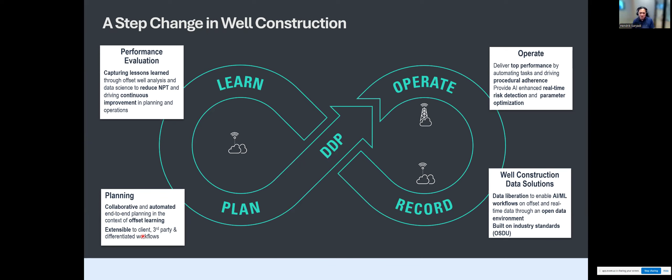In the past, it was a hell of a job for many years when different operators took over, because they needed to manually bring data from the old, let's say, Shell system and convert it to the Total system. Something happens in between, etc. Right, so I'll show you more about it. Does that answer your question? Yes, it does. Thank you. I hope you will understand more of the challenge and what we've achieved in the next couple of slides.

So the first thing when we bring in digital transformation, which is happening in many other industries as well, is cloud computing. Why is this a game changer? First, it changed the way we collaborate. I hope everybody here is familiar with Microsoft 365, right? You can work together in one document. Ten people can work on it together, no matter if they're in the same room, same city, or working at the same time. You can update that one document and you have a history record of who updated what, and that's how we want to collaborate.

At the end of the day, what we deliver is the drilling program. It's still a document. We still work with the document, but now the document is digital. Or you can still print it as a copy, but at least now it's not like you're sending an email: could you please update this? And then you send it on: I already updated, could you send it to the next person? Everybody can jump in together.

You've been requesting, okay, please attach this picture there, and so on. That's changing the collaboration. That is possible because now we put things in the cloud, right? Not on one person's computer.

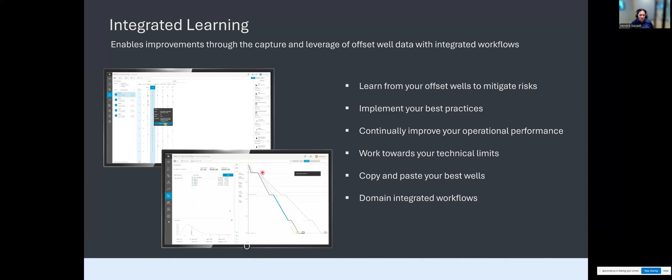Whatever you want to ask: what is the weak formation? What was the last FIT being used? Then you start asking what-if scenarios. What happens if I increase by 0.2 ppg, all those things? And at the end, probably this is what interests you: just create me a time versus depth. So instead of the drilling engineer manually plotting time versus depth for every single offset well drilled before, the application reads it by itself, generates this plot in the background, and at the end just proposes the best estimate.

So I've been talking about this one. So now after you learn, how do you plan the well? This is always what happened traditionally, and many of us are still doing it these days. How many software do you need to use to plan a well? You expect planning the well to be very straightforward like this, and it would be nice. I know where I can put my rig. I know where the target given from the G&G is. Okay, I plan the trajectory. Good.

Based on my trajectory, I can plan my pressure window. I can predict where my formation tops are, what the formation temperatures are. Good. Then based on this, I can plan my casing points, wellbore geometry, what size of casing. Good. Then I can start planning how to drill each section, what BHA, and that's it. Finish the drilling program. That's what we want to be reality to make our life easy.

Apparently, that's not the case, right? You're doing all this, and then when you design the run, they say, oh, of course, my BHA will not be able to deliver the trajectory. Now I need to revise the trajectory. If you revise the trajectory, the pressure window calculation changes, the formation tops change, the formation temperature prediction changes. Then you need to redo the casing design again, right? You try it again. Did you find a tool that can deliver the trajectory?

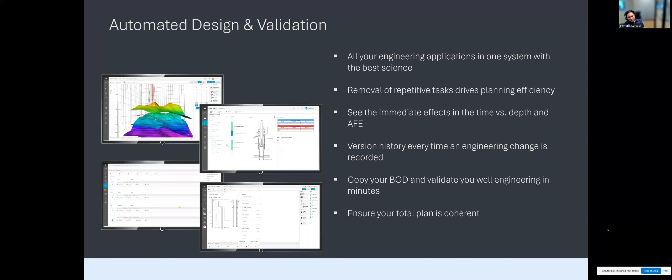So the steps can be like this. It knows what different designs need to be done, right? I hope people here are a little familiar with what's involved in making a drilling program. You have to design the fluid, check the casing integrity, design the trajectory, select the rig with all the equipment and its specifications, calculate kick tolerance, etc., right?

Then the idea is, if someone is making changes on one of these objects, for example, changing a trajectory, in the background it should just trigger all those different engineering calculations. So whenever we engineer or design something, there is always a validation check. You calculate the hydraulics, see what the ECD is, what the total pressure is, how the hole cleaning is.

When you try to run a liner, what is the best speed? Is the speed okay, or is it going to cause swab or surge? Can you pull it in case you get stuck? In case you rotate, can the torque still be handled by the makeup torque of the casing joint, or the BHA, or the pipe, or even the top drive, etc., etc.

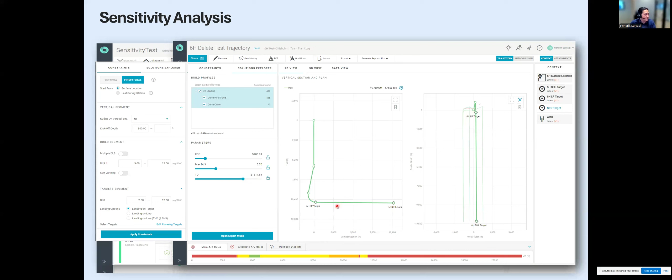Same thing when you run an engineering calculation. Doesn't matter whatever calculation you run: casing design, kick tolerance, torque and drag, hydraulics. Those results are a combination of parameters, right? And normally you run it once, you see the value, you don't like it, you change something in the parameters, you run it again, and then you keep doing that.

Now we ask the computer to do it differently. Say, I want you to please run the hydraulic calculation and torque and drag for all this section, right? Calculate every 100 feet I'm drilling, and I want the combination of, we call it sample rate 4. So calculate with 4 weight on bit, 4 RPM, 4 flow rate, and 4 fluid density, right? Or in this case 5, 5, 5, 5.

You submit. Of course, it goes to the cloud, using all the computing power of the cloud server, giving you back the result. Now you have thousands, even millions of dots that you need to display. Then of course, when you display it, you need to have an interactive display. Excel will not be able to plot this output. You need something more powerful, like Power BI or Spotfire or whatever it is.

Then now you can see, you can choose. I want to see all the results with 122 RPM, right? And then the graphics are seen. So instead of you manually going one by one and changing, now you ask it to calculate first, and then you evaluate. Based on this, it can tell, right? If this is the rig pressure limit, it will tell you that everything you see in green with 1000 GPM, you cannot use it.

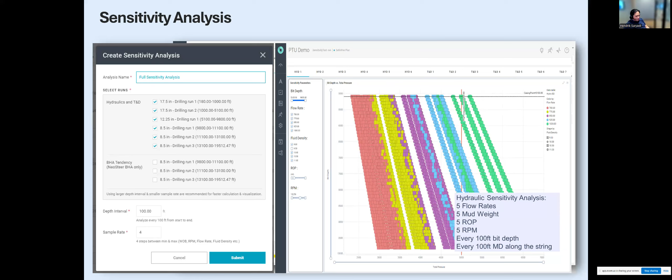So now we're talking about modeling, right? I can do a lot of calculation. I can ask the computer to run me millions of calculations if I want. But the fundamental question still remains the same: how accurate is all this calculation, right? When we try to simulate hydraulics, how accurate is a drilling hydraulic calculation today, right? So,

of course, many of our calculations are based on physics, right? Torque and drag is static and dynamic. Engineers have been doing this in many other industries, right? Hydraulics, you have fluid dynamics, you have temperature effects and everything. Of course, the PhDs run all these different mathematical models, and later on those mathematical models are input to the software modeling, right?

But of course, the challenge of all these pure, we call them first principle models, right? Either thermodynamic, fluid dynamic, statistical strength, whatever you call it, the mechanical engineering stuff, right? The challenge remains the same: they might not capture all the phenomena. This is what I call uncertainty or assumption, right? There's a lot of input involved in what actually happens in drilling.

I know the size of bit that I use. Is the hole being drilled exactly the same as the size of bit I'm putting inside the hole? Well, we can only know if we run a caliper to confirm that. I know the size of the collar. It's made from steel. These are the properties of the steel, how much is the strength, etc. What is the stiffness? We can simulate that. If I rotate at 300 RPM, is it going to induce vibration or not? Well, a lot of PhDs have been studying that. But at the end of the day, it may still not capture the phenomenon.

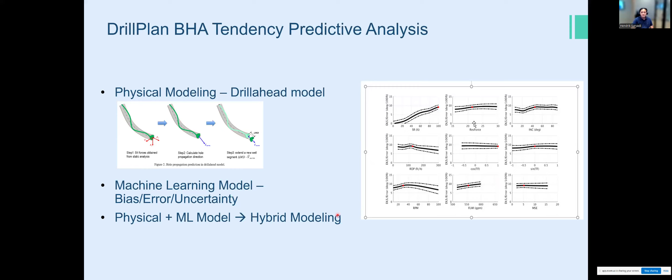The other thing is the digital twin, because we can simulate. Let's say this one is pressure. I want to know the pressure when I'm pumping fluid from the pump down to the bit and back again. What is the pressure distribution? In the past, you needed to put a sensor to know the pressure. Now, because we can simulate all this process and it's getting more and more accurate, I don't need a sensor. This is what we call the digital twin.

You know the value of things without putting in a physical measurement. You make a digital representation of these properties, and then you can simulate many things, and based on that you can make a design. This is being done in other industries, like aircraft, when they're doing a design, right?

Sometimes they don't make all the parts right away and then test them. If they have control of this and a model, they can create the physical asset in the computer and see if everything will work before actually making the part, right? So that's what we call a digital twin. You can simulate things digitally before you need trial and error, because that's going to be expensive.

And this is the fundamental if you want to predict ahead, right? Simulate things digitally, and then use that to see: what if I implement pretty much the same principle in the next well, what is the expected value if the whole system works, right? The same thing as people designing a turbine or an aircraft engine, right?

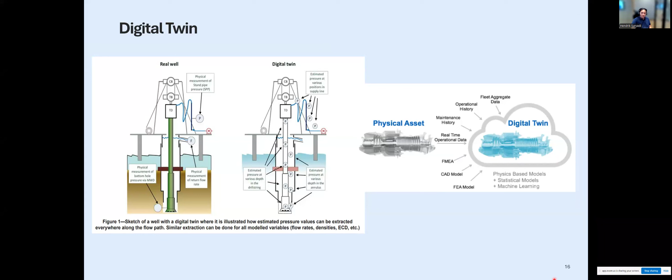There are many other things we learn from other industries. In drilling, we're always dealing with scheduling, right? For example, this is rig scheduling. If I have a fleet of 10 rigs, where should each one go? That's a big task for a person, right? Or even two people, or even a team. They're trying to save cost, but it's only as good as the assumptions.

Apparently in other industries, like a manufacturing line, right? Or even truck scheduling, they just put it in the computer: these are the 10 trucks I have, this is all the work that needs to be done, please suggest the arrangement of tasks, which truck needs to go where.

So the same thing is what we're trying to implement in scheduling our equipment, our rigs, our supply boats, etc. And this AI scheduler was actually developed by Google, I think, if I'm not mistaken. But of course, Microsoft has their own AI scheduler module that you can easily use.

Same thing. Then you start throwing more questions to the digital system. If I have a database, I know the record of performance and attach those records of performance to its BHA performance record or BHA run report. Now I ask a question back: if I'm gonna drill in this field, in this section, please give me a rank. Which one is the best?

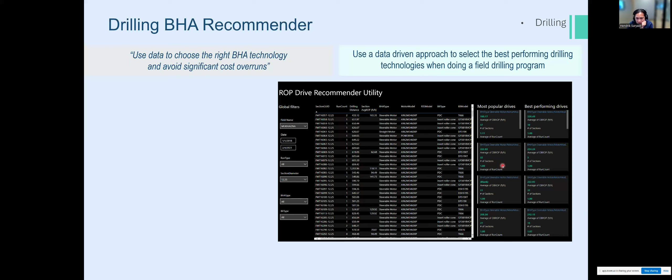Same also while you're drilling. I already showed you a bit of an idea of asking the system to run different scenarios: suggest me the best parameters. In that case, it's just doing the same concept. We've been recording. Every time we drill, we record everything, right? We're recording how much weight on bit applied, flow rate, pump, RPM used, and performance.

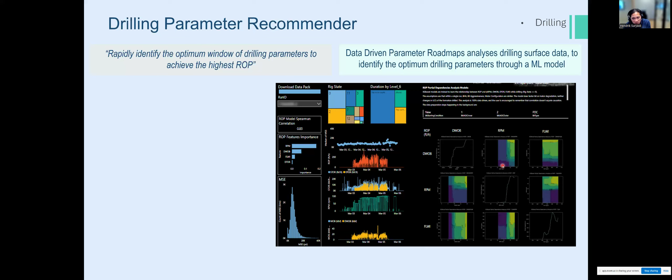Now you're asking the same question to the system: tell me, I'm drilling now in this formation, what is the best ROP, RPM, flow rate I need to use? Then, for example, the bit, you have one bit design. You're asking how many bits I need to order. Is it gonna survive? Then it looks again at the past record. It simulates the probability of survival.

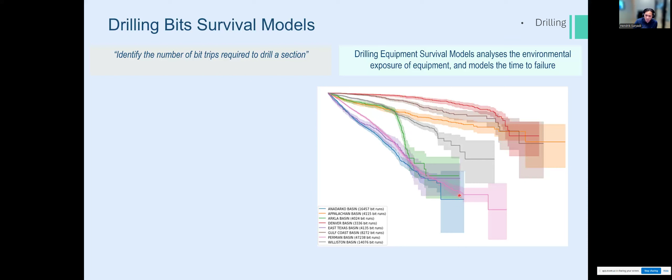This concept is being used in many other industries as well. It's used, for example, in planes, right? To know when they need to stop the plane and do maintenance, right? They will simulate at what point it starts failing, right? So if we can plan ahead to simulate this before we actually put the actual equipment in the hole, then it gives us a better idea to make a decision, right? There are many other things.

If you go digging in SPE, people have been trying to utilize, on top of the data, different kinds of artificial intelligence and machine learning techniques on different topics, right? On predicting gas oil ratio, what does this mean? It's saying I don't need to put a sensor or have someone measure it. If I have these properties, just tell me the gas oil ratio right away. So I don't need a human actually doing it. The same thing also, if you can predict formation types ahead, then you don't need to put LWD in the hole, right?

So at the end of the day, as mentioned, for planning, what we deliver is a smart drilling program. In reality, drilling engineers spend a lot of time like they become a secretary, trying to collect different input from different people involved and putting it together as one nice document, right? Now the question is, can everybody just contribute? So how to make a drilling program collaboratively? I mentioned at the beginning how people need to work. Microsoft 365 and the like have been helping.

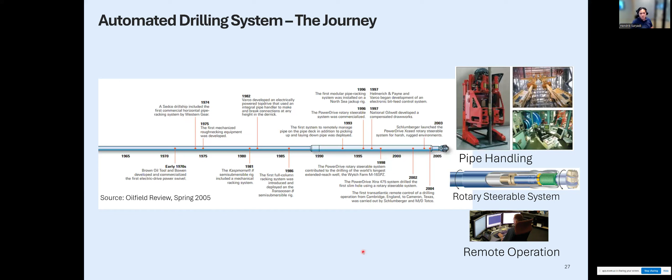And then after the smart system, now we need to start bringing tools that help drillers make decisions, seeing what parameters are used. If I want to increase the ROP, what parameters need to be used. The system, based on engineering calculation or learning from past experience, should be able to tell: okay, in this formation at this depth, based on past experience and my simulation, use this number. Then the driller says agreed,

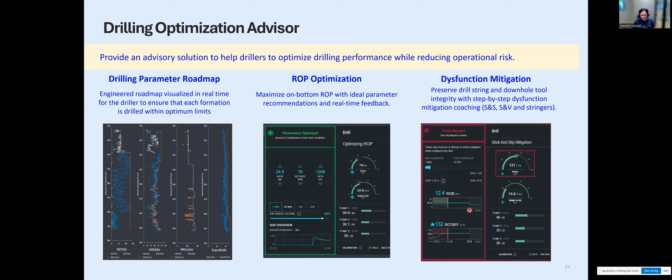and it will adjust the top drive and the pump automatically. Later on, while you're drilling, suddenly there is stick slip or vibration. It gives a warning saying, please follow this step. You agree? Agreed, and it does it. It reduces the weight on bit and increases the RPM within the next 15 seconds. So the goal is this: the driller just needs to watch and wait until something beeps.

Now we've managed to get to where the driller says just go drill a stand. It knows how to go on bottom, increase the pump without causing a pressure surge, tag bottom, and then drill fully and make the connection. With auto ROP, the driller says optimize the ROP. It knows what parameters need to be adjusted, and the computer takes care of the machinery.

If you need to send a command downhole, before the driller or directional driller or MWD needed to adjust the flow manually; now just click a button, send this command to this tool, and it will give the required sequence automatically. So even a steering tool downhole is told: this is the trajectory plan, please deliver this dogleg as per plan, or catch up to the plan if you deviate from it.

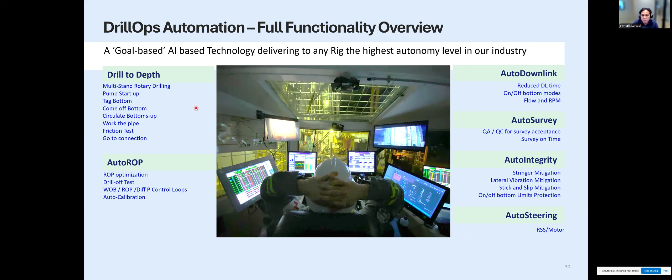So that is in the drilling front. What about all the data from all this machinery that has sensors on the rig? Of course, it also requires maintenance. The idea is to schedule the maintenance not in the critical time of drilling, right? So then you need to predict when is the best time before it actually completely fails, right? So the top drive, the draw works, all this big equipment.

So if the system can read all those data and then predict, okay, if we continue using it like this, in the next 3 days the top drive will need repair. Then it will try to find in the next 3 days when is the time that I can do this maintenance without doing it in the middle of critical drilling time and then causing NPT, right? But sometimes this is a hard decision, unless you have a system that helps analyze the data and proposes that information to you, right?

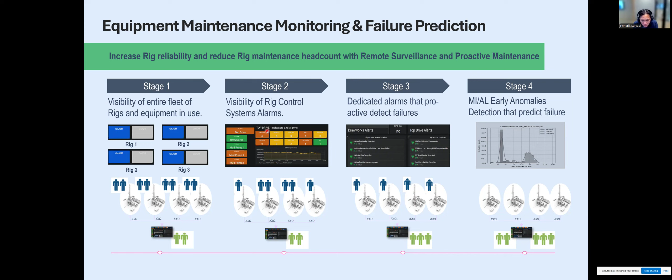So how it's being done is just looking at those digital twins, either by pressure or vibration level or whatever it is, depending on what type of machine you're talking about, temperature and everything, and then they start giving you suggestions, the possibility of failure like this, right? Then people who need to find the schedule time can put it in before it actually completely fails and causes NPT.

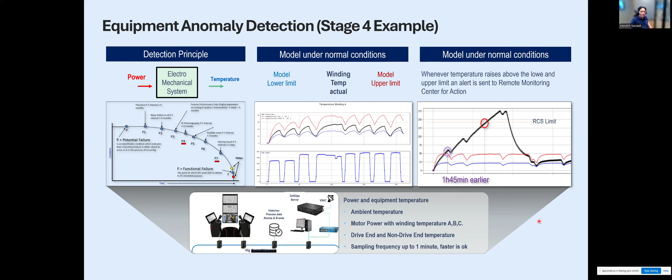The other thing is video surveillance. We can easily put a video camera anywhere now, right? But the question is, do we need to put a human behind it to watch it and then tell someone, you are in the dangerous zone or something will happen? Or I can get the video and then have a computer read the data and only send a notification alert, turn on the alarm when danger occurs, right?

So now that can be done, and you just need to wait until it tells you something will happen, right? So this is being used in truck loading, burner control, well site monitoring, all these different operations. And then all that information can also be sent to town, right? The person doesn't have to be on the rig watching all those things.

But now these days in the monitoring center, sometimes one expert can monitor 4 or 5 wells, because he doesn't need to look at the data coming in at every single depth, right? He just needs to rely on the smart monitoring. Whenever one of these raises an alarm, then he can review the information, make a decision, right? And take action. And then after that, leave the computer helping him monitor the data and wait until the next alarm comes. So that is smart monitoring.

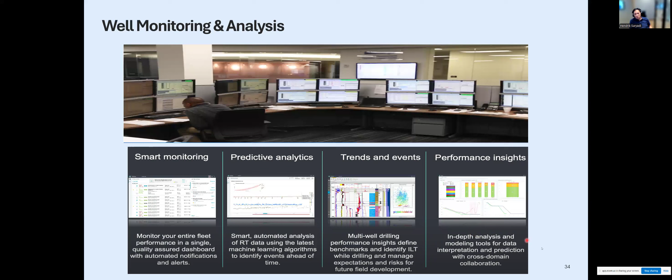And then at the end, after all this is monitored, what we are always interested in is: give us a summary of the performance and which areas we can improve. All right. If at the end it can just summarize that, make a quick plot, then I know what things to think further about for the next planning, or during drilling, what things need to be improved day by day. All right. So yeah, all this is smart monitoring.

There are many things that can be monitored now, like stuck pipe. Tell me, beep me, or notify me if we are approaching a stuck pipe risk. Also, drill string integrity. Tell me if the vibration will potentially damage the drill string, and drilling efficiency, etc. Right.

So I talked a little bit about predictive analytics. It's just if I can start using all those models, simulation, hybrid modeling to predict ahead, that even helps us mitigate the risk before it actually happens, right? Yeah. So for example, this is predictive analysis using a Bayesian network. Don't ask me the details. I'm not the AI expert, but they're using this concept.

For me as a drilling engineer, what's important is: just tell me the probability of stuck pipe, right? And notify me when that's going to happen. Then I can fix it before it happens, right?

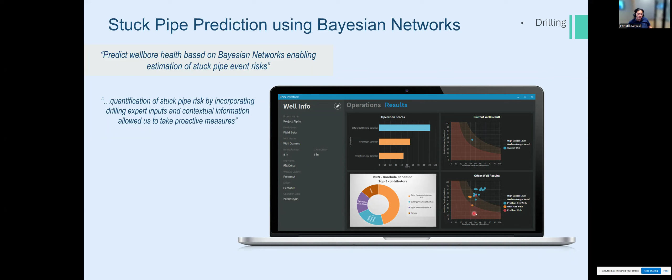Yeah, looking at giving evaluation of the performance in a single well or multi well, so I can use that information to improve the performance of the well that currently I'm drilling or the next well that I'm currently planning. Right? There is more technology.

For example, here, sometimes when we're drilling, we only see numbers, right? In the gauges that we see on the surface. But it will be better if you can visualize what is actually happening downhole, how the bit is cutting the rock, all the load involved, and that's what helps with this augmented reality, virtual reality, right?

For example, here during the wireline operation, the operator can see all these values. He doesn't have to be sitting in his truck seeing this. He can see using the Google Glass, seeing all these values while he's sitting there. If he needs to access operating manuals, he can tell the glasses, okay, I'm doing this, going in. Please tell me the procedures for this. It breaks it down. So yeah, then it helps them to work more efficiently.

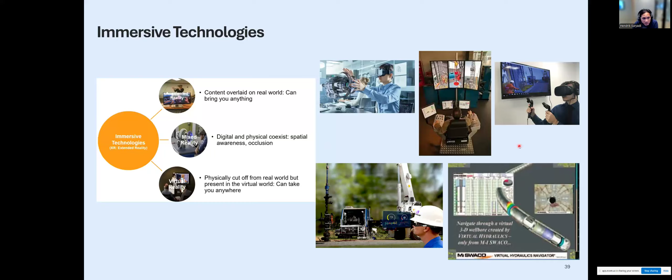How to visualize the hole cleaning, or even as simple as just for training, right? Simulate different cases for training new people. So that's all I have. Hopefully giving you a bit of an overview of how digital technology is being used or currently still being implemented or developed in well construction.

All right, now I open for any questions. Mr. Suryadi, I want to ask something relating to the nature of jobs in this niche. It's already apparent how to strive towards a particular career path in the industry. Like if you're doing drilling work, then you should improve in that aspect and so on. But this automated drilling and digital drilling seems like an alien type of sub-branch of drilling. How does someone become a subject matter expert in this niche? What are the requirements?

So first, if I look at my career path, how I ended up here, my background is mechanical engineering, and then I joined the oil and gas industry with SLB, and I've been trained. My background is a drilling engineer, right? So it's always the domain. When we talk about digital transformation, before, the industry was asking, do we need a group of software engineers and teach them about drilling, or do we need a drilling engineer and teach them about software? The answer is none of those two, because it will be difficult either way.

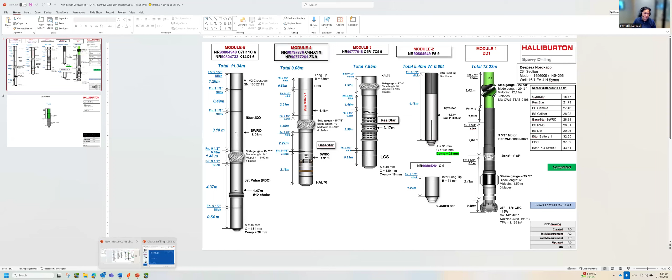So I think that is the best part, and I believe in many other domains, some of those papers in SPE are just collaboration work between these two worlds, right? But mainly driven by the domain expert itself. These people are good in their domain, but they open themselves to work together with the software people, right? Or with the data scientists.